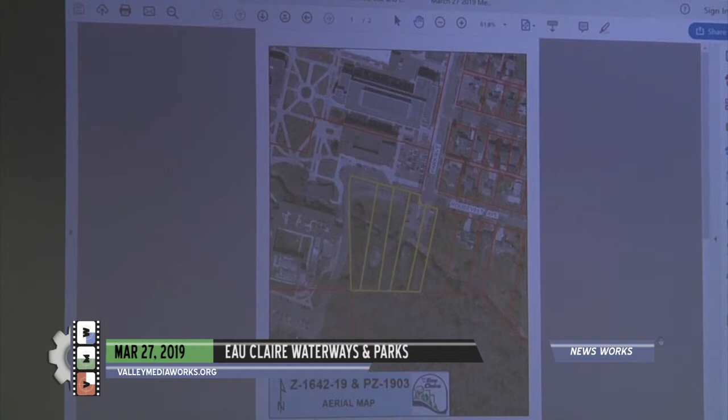University of Wisconsin Eau Claire and Ayres Associates are requesting to rezone property from R1 to public, and then for approval of a site plan to construct a new visitor center at the southwest corner of Roosevelt Avenue and Park Avenue. The property abuts Putnam Park and Little Niagara Creek to the south, thus requiring review by the Waterways and Parks Commission. The west portion of the property is currently zoned R1.

That would be rezoned to public. The east portion is already zoned public. The overall size of the property is about 1.3 acres.

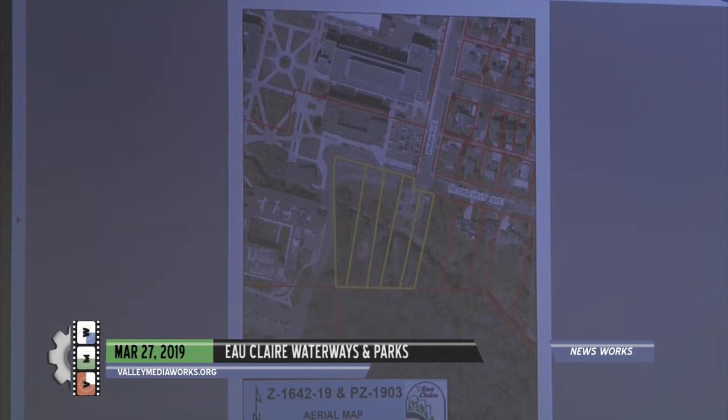So here's Roosevelt and Park Avenue. This is the parcels right here. You can see Little Niagara kind of going through here. Roosevelt Avenue actually was vacated west of Park Avenue last year, so this is all part of the university campus here.

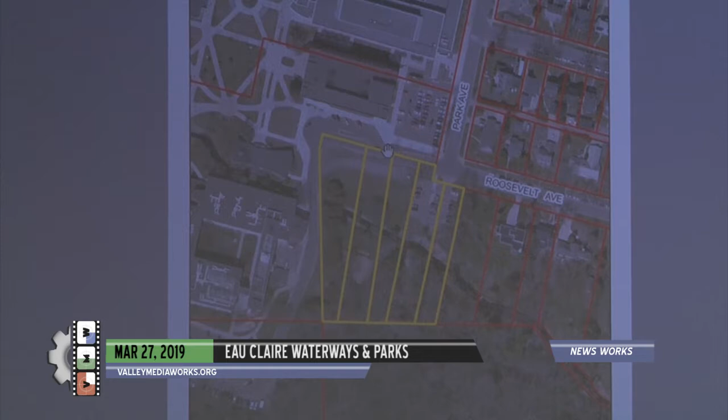This shows the zoning within the area. As I mentioned, the west portion here currently is zoned R1, and that dates back to a few years ago when there actually were some homes on that lot. Those homes have been removed, and currently the property is vacant. The east portion right here is currently zoned public.

So as I mentioned, it's kind of a two-step process. This portion would be rezoned to public, and then we're looking at a site plan for the visitor center. As you'll see with the site plan, the actual portion of the visitor center will be on the north side of Niagara in this area right here. The site plan.

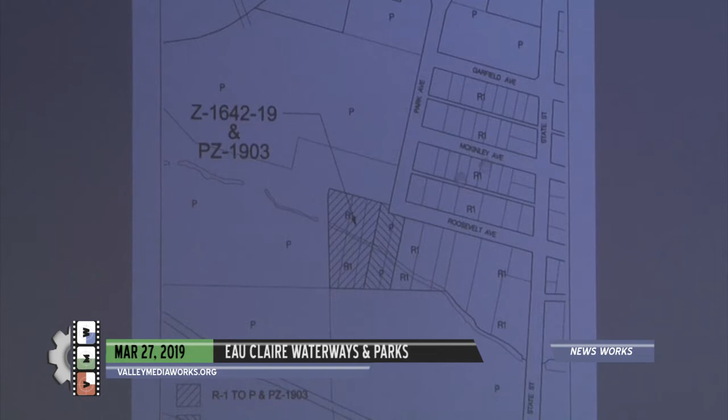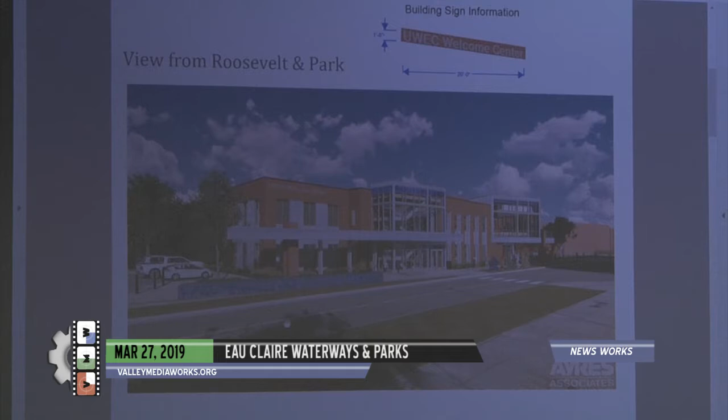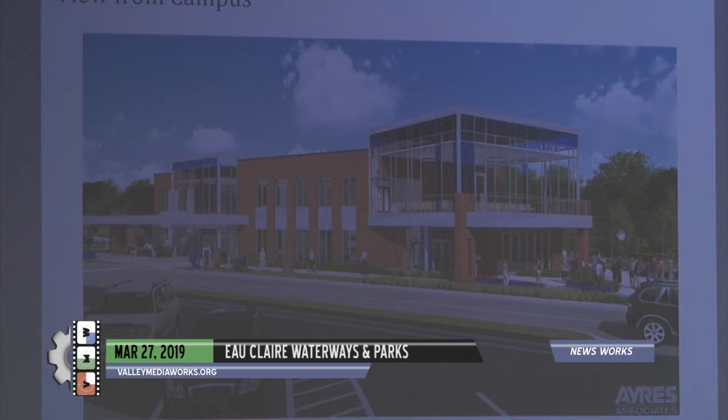These are some artist renderings, conceptual, looking from Roosevelt towards the southwest, and from Roosevelt looking towards the southeast. The back portion back here would be where Putnam Park and Little Niagara is located.

This is looking straight east, so this would be the west side of the building. You can see with the site plan there are some plaza areas back to the southwest portion of the building, back in this area here. The third ward residential area would be back in this area here, to the east of the building.

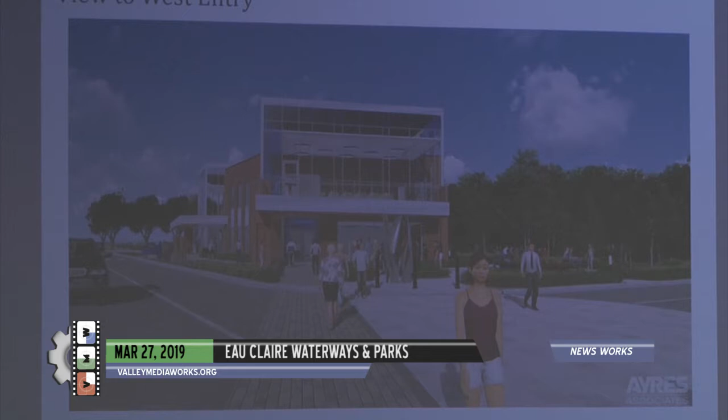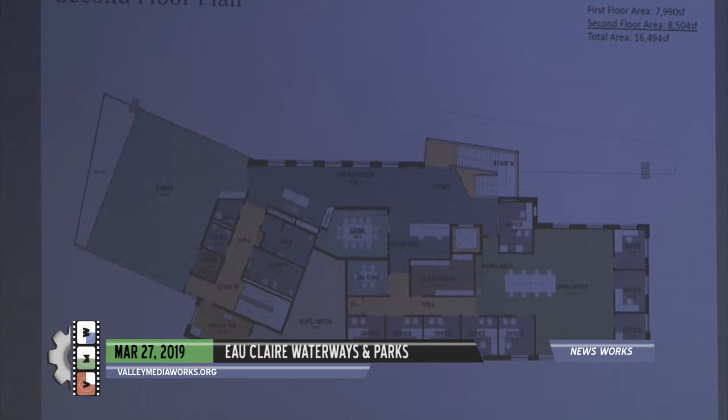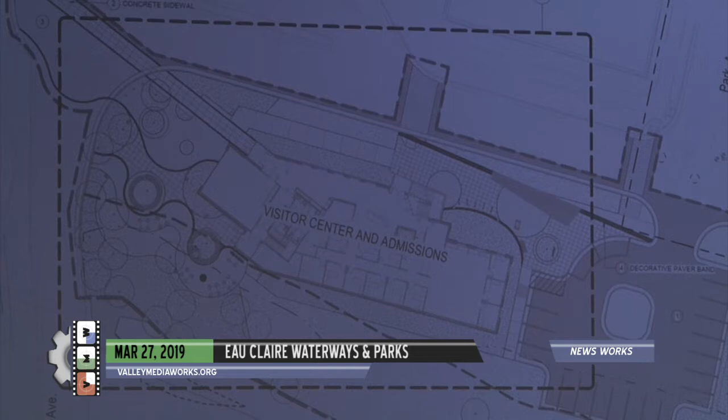This is the plaza area back to the southwest, again using the different kinds of materials. There are some planting beds along the building, and then planting down along this area as you get closer to the creek area.

One thing I did want to note regarding the building and the landscaping is when referring back to the waterway guidelines, the site plan and building does a nice job with following some of the guidelines within the plan, such as for the building features.

Some of the recommendations are that the building have equal facade treatments on all sides, windows facing the waterway, and that it encourage plazas and decks. Materials of the building should be wood, stone, or architectural accent materials, and low reflective glass. So a lot of the things recommended in the waterway guidelines are incorporated into the building itself.

The landscaping itself I mentioned also has provisions in the waterway guidelines. This site plan does a nice job incorporating those types of landscaping along both the front and the back, closer to the waterway itself.

Lighting for the site will include a variety of fixtures, including pole-mounted fixtures for the parking lot area here, and some pedestrian or lower bollard-type lighting in the plaza areas located in this area here. There's also a decorative lighted wall that would be located along the front of the building, lit internally with LED fixtures.

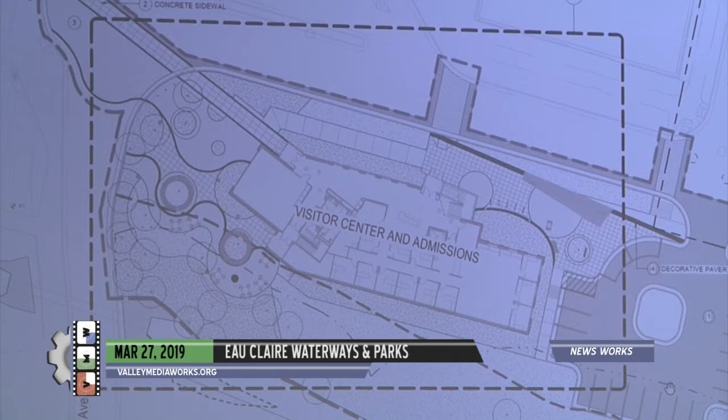As with previous applications with the commission, the focus should be on the comprehensive plan and the waterway guidelines. The comprehensive plan and the third ward neighborhood plan both show this area as part of the campus boundary, so it is consistent with both of those documents.

Staff recommends approval of the rezoning and the site plan as they pertain to the waterway guidelines, with the one condition, subject to DNR approval of that wetland waiver.

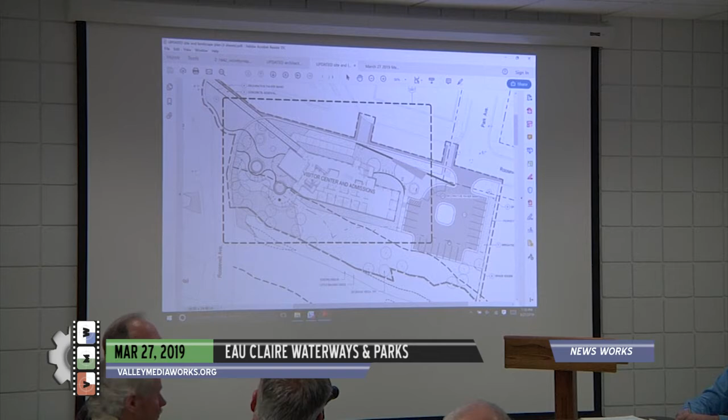This will be reviewed by the Plan Commission next Monday on April 1st and then by the Council on April 8th. So with that, if you have any questions, there are representatives from Ayres and from the university here. Anyone have any questions for Pat at this moment?

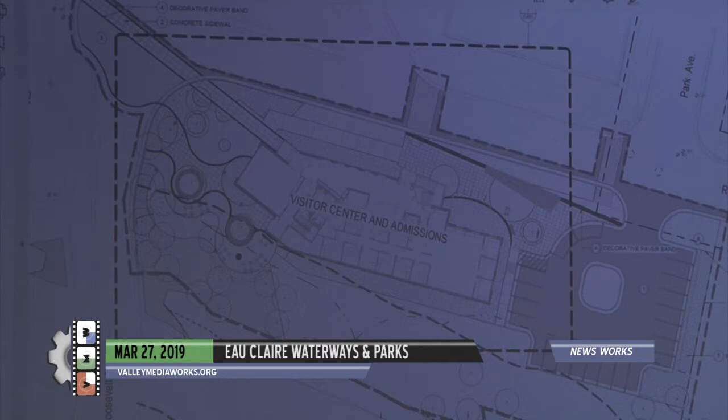There's another dashed line that looks like it lays right on the north border of Little Niagara there. Right here? Not that one, just it's a long, right there. What is that?

We'll have someone from one of the applicants explain that. Okay.

I think they did a nice job. Obviously somebody put a lot of effort into it. The building materials are attractive and fit in with the character of the campus, so I have no problem with that. The reason we're looking at it is that it borders Little Niagara.

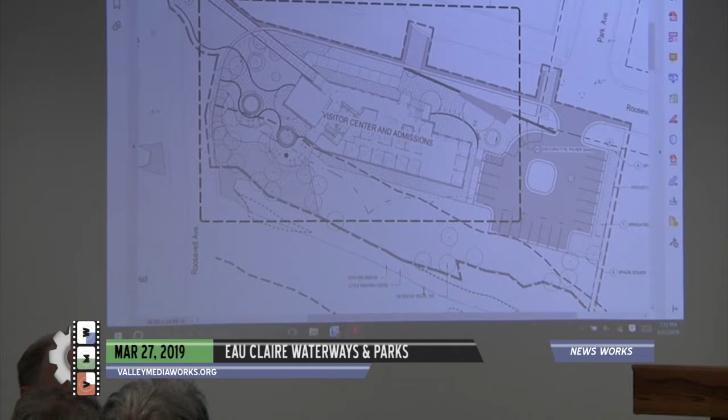I'm surprised we didn't get an artist's concept view, the color view as it would look from Little Niagara. We saw the front side, but not the back side, not the south side. We did have the drawing, the elevation, but I saw the elevation, I didn't see a color artist rendition.

This does show the different types of landscaping, different kinds of building materials and landscaping materials being used back in that area. So this meets our requirements. I'm sure it's just fine, but in my mind, when I looked at that black and white line drawing of the south elevation, it looked kind of plain, and I was hoping to see an artist's rendition of it.

Susan? I had the same reaction. I felt like all the huge windows are on the fronts and the ends, but the part that actually looks at the waterways are private offices. And that facade, the waterways plan is rather specific about the part that's parallel to the waterway not appearing to be just a long blank wall.

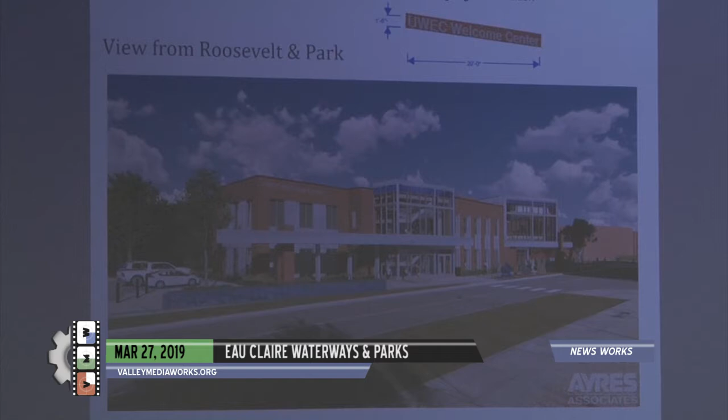Well Pat, did you say they have similar facades on all sides? They do have the brick facade, same as on the front side of the building, on the back side of the building. No, it's a lot different, but based on the standards, there are a number of windows along the back facade.

And you have this area on the west end that's much more glass, which would be this area right here. So if you're looking back along from the waterways, this whole open area basically fronts or is open to that back area. So I guess, as I mentioned, our feeling is it clearly meets the guidelines.

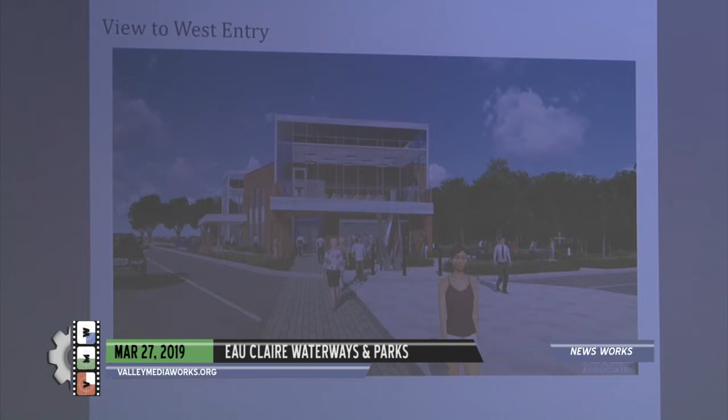Eric? Can you go back to the one that had the drawing, just black and white? I'm sorry, the one we were at with topography. Yeah, that one, this one.

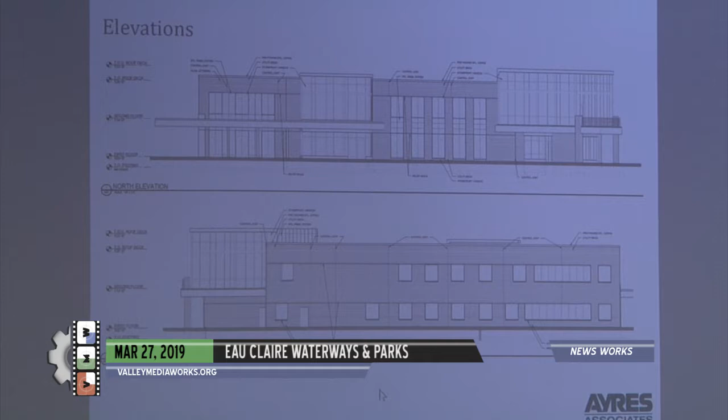I was just wondering about the DNR, if there's a paver over there within 50 feet, because that pavement over here, like that little circle area right here with the black dot and all those, would that need to have some type of waiver? For the city standards, the building should be at least 50 feet from the ordinary high water mark.

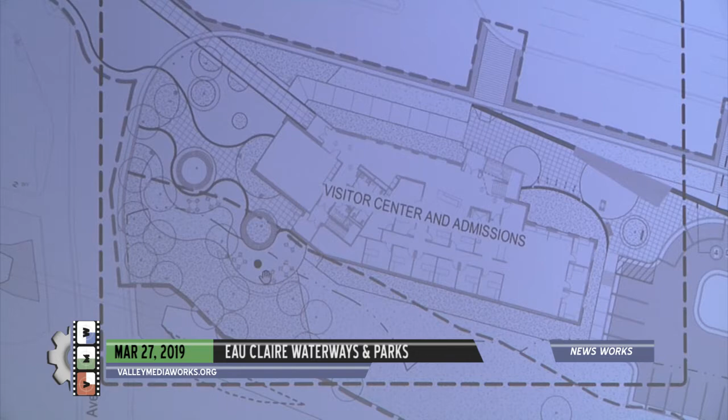It's acceptable to have these plaza areas within that area. Isn't that what they're asking, a variance on that 50-foot setback to put the garden areas there?

It's my understanding it's for the parking lot area back here. That's for the DNR to decide. But for our commission, I think we're deciding on this, on the left side there, the garden areas. There is landscaping and development being done inside the 50-foot setback, and that's acceptable. The 50-foot setback is for the building. You can have the landscaping within that 50-foot setback.

Tom? The one thing I really see as an advantage is that there's access to the creek. There's seating and ability to sit by the creek and do whatever, where now that land isn't accessible or people don't use it in that form. So by building that plaza to the west and to the south, I think that'll really be a nice area and a nice enhancement to the creek.

For people to enjoy the creek. One of the things I've always felt is that UW never really used and realized the value they had in terms of that creek running through. They're doing a much better job now in the latest buildings and renovations that have occurred at the university.

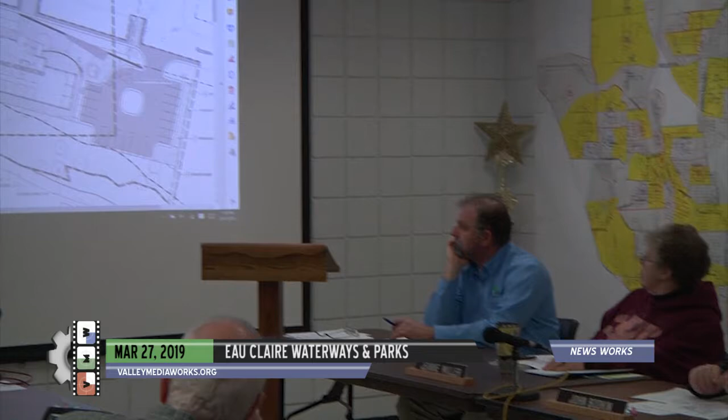Ron? What does that dotted line to the south represent on the creek? Right there, what is that? That white dash line, which specific line are you talking about? Where the hand is located right now. Is that a wetland boundary? That's just a contour line, but it's where the creek is flowing. It's the creek edge.

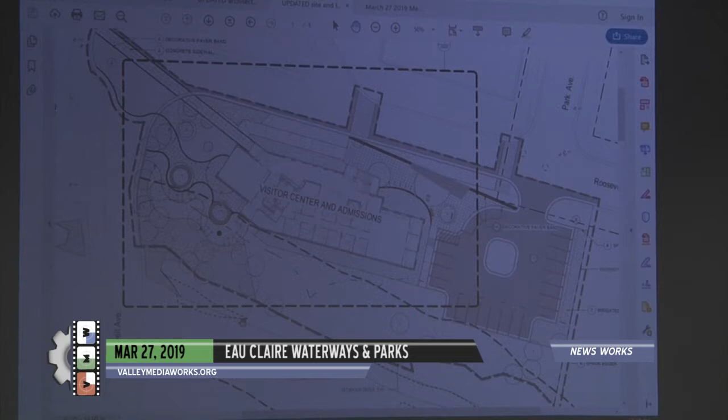Well, I think the north side is flush with the heavy dotted line, but then you have that smaller dotted line perhaps representing the south. Well, is that the case?

The creek is right here. So the creek would have a dotted line farther to the right of where the hand is, but then it gets hidden by the dark dotted line. So up on the left side, that's the south boundary of the creek, I think.

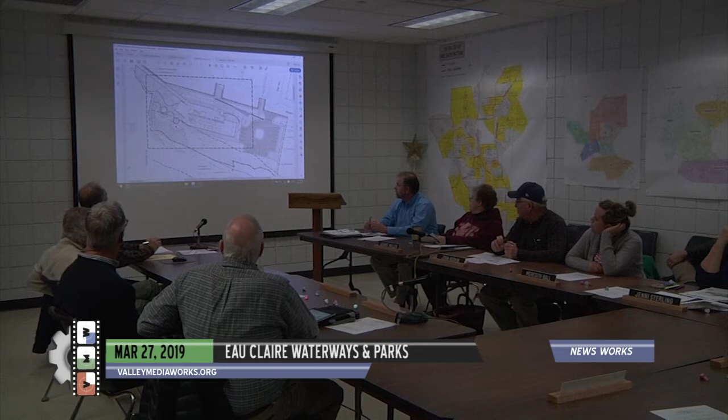I think it's a contour line, the edge of the creek. The straight line here indicates the wetland boundary.

For the short dashed line, so this one right here, yeah. So from the wetland boundary, this is the 50-foot distance right here.

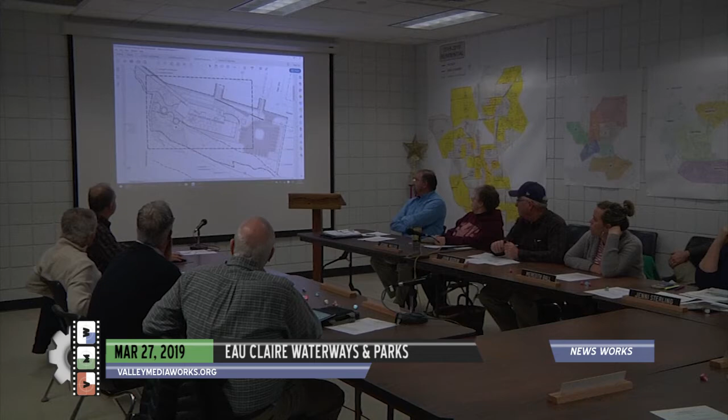Are there more questions for Pat? If not, I was going to invite, okay.

I think what a lot of people are mentioning here is what I'm noticing. When I first looked at this, I see that the building is completely parallel to the street above it, but askew to the creek below it. Therefore, in the planning of this building, not much attention was paid to the creek, or not as much as the road, even though the creek was there before the road and will be there long after the road.

I really don't know why they feel the need to have a front yard for the building. It could be beautiful, I don't know, but you could just as easily have moved the building closer to the road and given more space to the creek.

And for all that is going on here, and for our guidelines, I don't see any of our best management practices slowing down the runoff from either the parking lot, the plaza, or the building. Pretty much everything's going right into the creek. Across the road there are two academic buildings which have a rain garden between them, but I don't see any rain garden in front of the creek here.

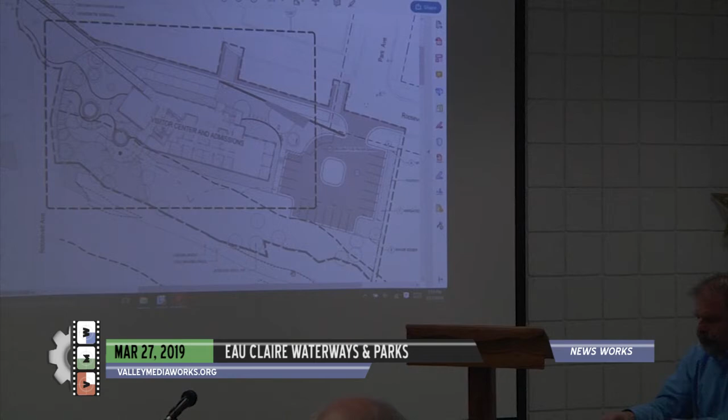The existing parking lot has a storm drain at the south edge that I'm sure flows straight into the creek. I don't know if that storm drain is going to remain or be replaced, but there should be something that slows down the runoff from the construction area into the creek.

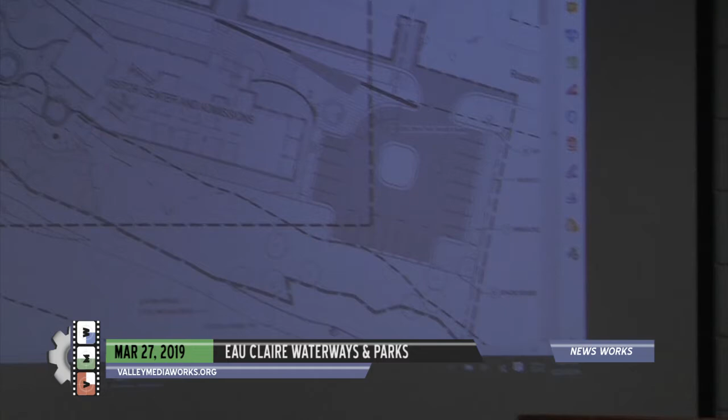That piece of property, even though the paper described it as a lawn area, has been a wasteland for a couple of years now. First the houses were torn down, then the street was torn up, and all the asphalt was piled up on that property. There's asphalt debris right now and no sediment control into the creek. I really don't think any attention has been paid by the architect to the creek.

I would like to see some kind of rain garden or berm to slow down the runoff, and perhaps some erosion control during the construction project at least.

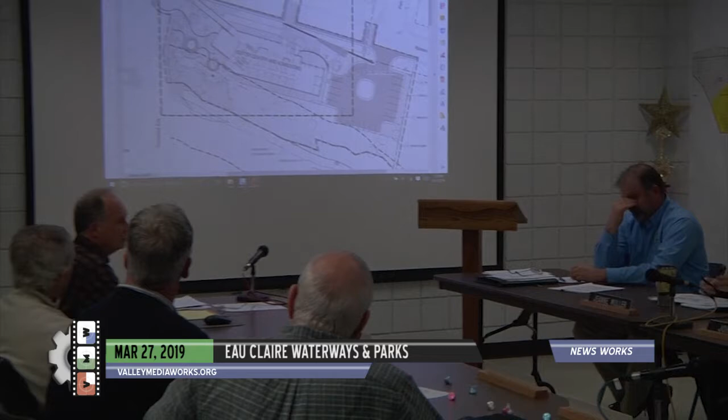The city engineering will be reviewing the drainage calculations for the project, and they'll be reviewing those kinds of things. During construction, erosion control is a requirement of the city and the state, and that'll be followed.

I hear your comments, and I saw that in the proposal here, but I don't have a lot of confidence in it. I think there should be something drawn on the paper and presented showing where the runoff from that parking lot is going, and the drainage from the rooftop of the building.

Kirk? Is there any pedestrian connection between the parking lot and the little patio plaza area on the creek side of the building?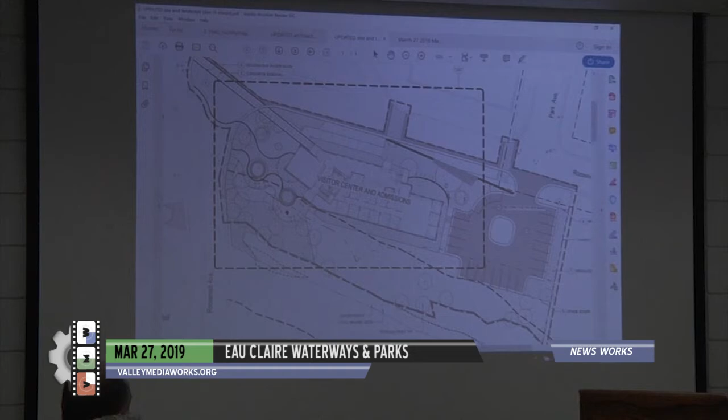It's my understanding that there would be, along the front and then over the side here. Just along the front, but not on the creek side? Not along this area here, no, that's my understanding.

How are they to access the other circled areas that would maybe be more? I think you can ask the applicant.

Actually, if there are no more questions for Pat, perhaps the applicant could address this. Is there anyone from Ayres or the university that wants to give us some information on the technical questions?

If you like, come up to the podium and introduce yourself, please. Lisa Fleming, I'm with Ayres Associates. I'm standing in for Angie Goodwin tonight.

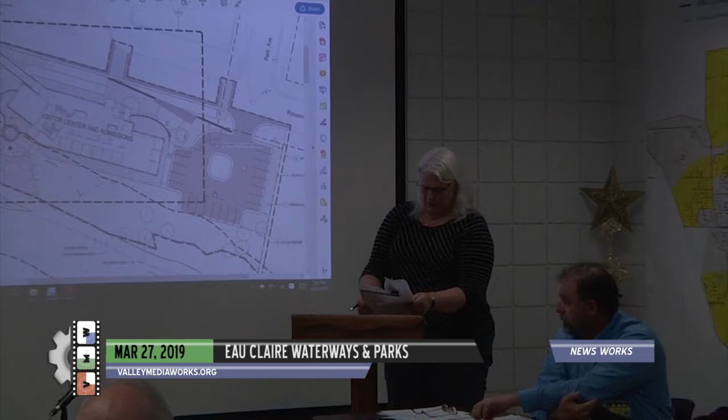There have been a few questions, so if you have any answers, you want me to just answer them then? Sure, go ahead. Okay, well, the stormwater is being managed per the DNR and the city regulations, and it will be slowed down and filtered before it reaches Niagara Creek.

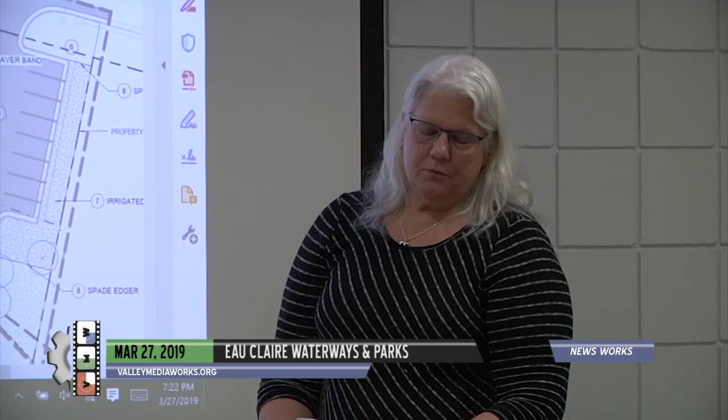We also have a biofiltration sediment area that's going to be incorporated, so it'll meet the city's requirements of 40% TSS, which is total suspended solids runoff. Roof water is considered clean water if it doesn't pass over a paved surface, by both the city and the DNR.

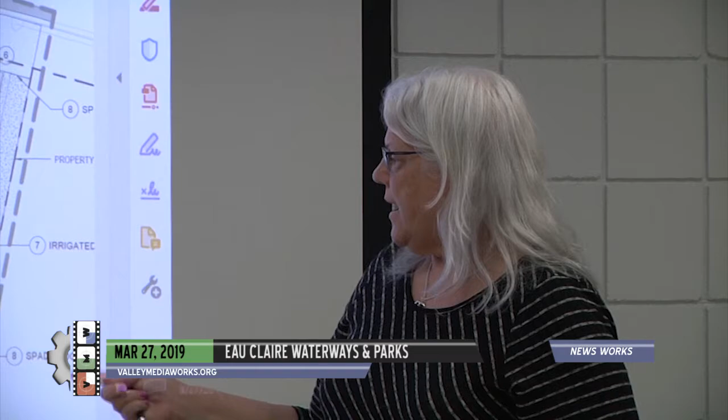The access to those little areas that you talked about will be from the parking lot, through and around here. There won't be a path along here.

Thank you. Were there other questions for Lisa?

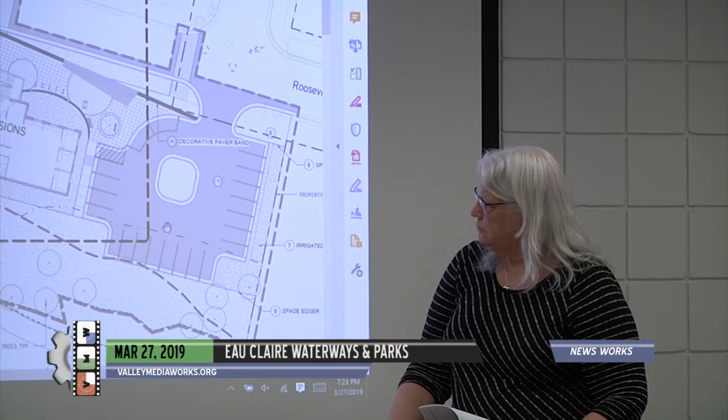Is the topography right there on the edge of the building? Do you know if it's slanted or flat? I would assume, but I don't have a definite answer on what that is.

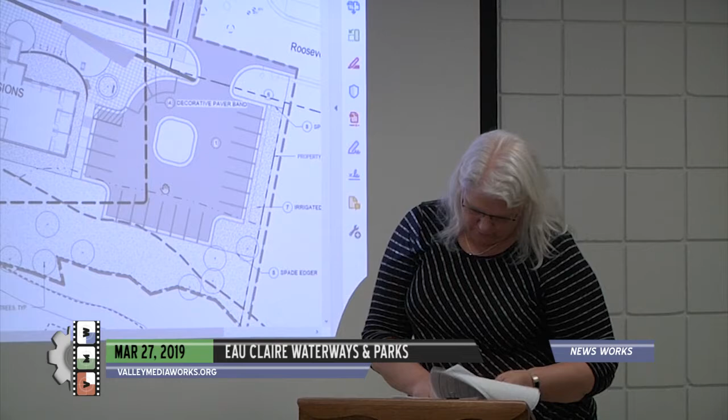Travis, do you know what that material is? I know it remains relatively flat as it separates away from the building for the first 5-6 feet, then it grades down more aggressively as it gets towards the creek.

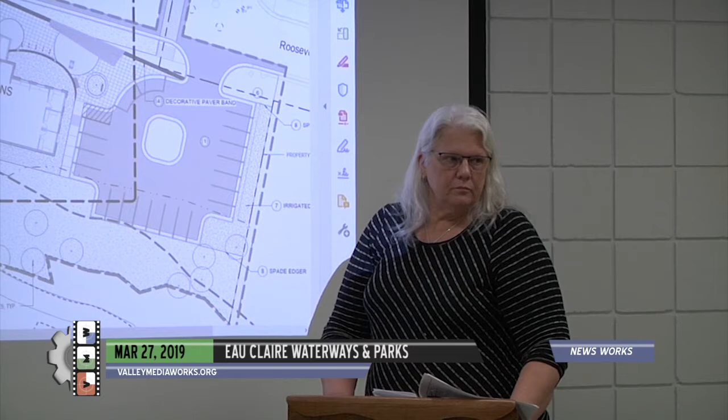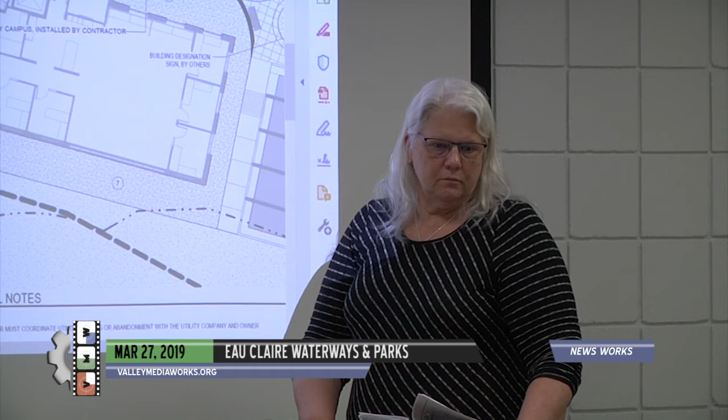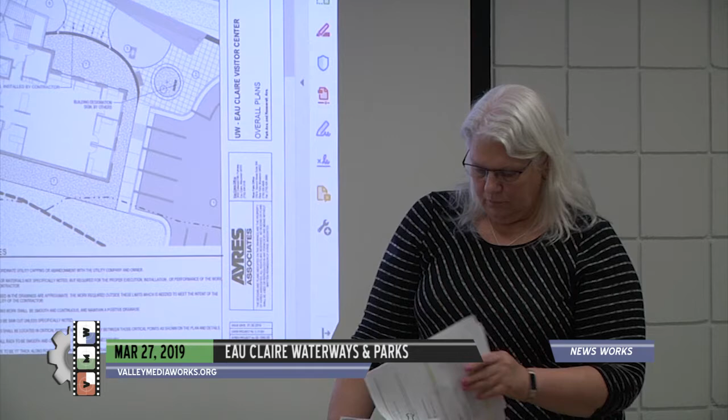Susan asked: I was wondering if you could comment, it does seem that the design places the individual offices on the interior, right next to where there could be windows or public access. I think of your other university designs as more sensitive to the environment, so maybe you can talk about that. To me there's a distinct difference between the south facade and all the other facades, and yet the south side is where the waterway is. Architect, could you bring up the image from the two?

Yeah, could you answer that, Travis? I'm not the architect, I did the site work. Obviously the project from the start posed an interesting question. In fact, this building has no backside - we face Roosevelt, we face the park, we have the parking lot off the east side, and we do face Niagara.

Obviously the programming, because we're parking off the side and pedestrian access is off Roosevelt, gives us a natural meeting point for people entering the building. So putting the offices on the roadside was an early decision - it probably wouldn't work best for what the university's trying to achieve, which is to provide a welcoming spot as you enter versus going further back into the building. We did consider quite a few options, trying to figure out how to work Niagara into this.

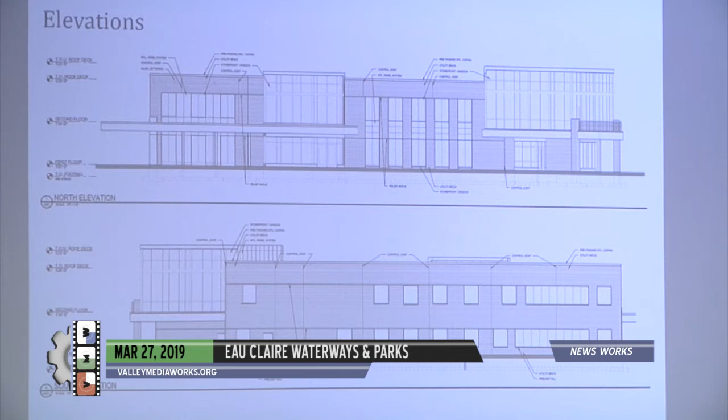Obviously it looks like the back of the building - we don't have all the aluminum panels we're using on the other sides, so maybe that's jazzing up the other sides more than this side. However, the presentation room, the lower sketch on your left, does look out to Niagara as well with that plaza. There was also some discussion that the workers in this space get to enjoy the view. Granted, the public doesn't see Niagara until they get to this presentation space on the second floor, but they are encouraged to go out and walk around, hence the plaza, to experience that environment.

Is the presentation space generally open, or is it like an auditorium? Generally open. The biggest thing is the presentation space serves both alumni and admissions in this building. It'll serve larger groups - admissions is on the first floor, so they take larger tour groups up to that larger presentation space. That space is also planned to be used for alumni events and a few other after-hours events.

So as far as remaining open, I guess that'd be more of a university question - if somebody from the public wants to come up and walk into that space to see the view, if it's not being used, perhaps Mike can answer that. I'm Mike Rindo, Assistant Chancellor for Facilities and University Relations at UW Eau Claire. I think they've done a nice job outlining it.

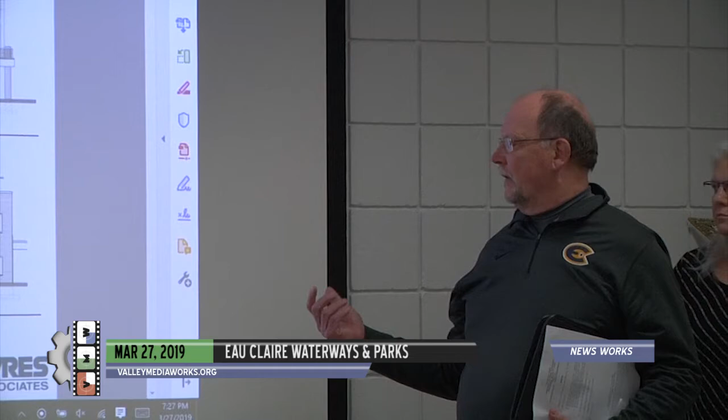We are trying to maximize Little Niagara, even though a lot of the views are from private offices in the building. The plaza is meant to create porosity from Roosevelt down to Little Niagara, and when people gather prior to and after tours, they'll be able to have overlooks of Little Niagara, with areas to come down and actually access the creek. I think the presentation room is going to have a million dollar view - one of the best views on campus, both into the campus and down to Little Niagara. I appreciate the comments about what the university's been doing to try and really maximize Little Niagara through the campus.

In the past, the old Davies Center abutted right up to it, and it really became more of an overgrown ditch than a beautiful asset, which we believe it is now. When we did the new Davies Center, we had one of the top DNR stream reclamation specialists come in and do a real reclamation of Little Niagara all the way through campus, putting in plunging pools, opening it up, making sure it's not overgrown anymore.

That would be the intent here as well, so it would be much more accessible to the public, much more viewed by the public, and the folks in these offices will really enjoy the view. In terms of the front of the building, I think they hit it right on the head. When visitors come in, they'll traverse the building down Roosevelt to access the admissions presentation rooms, and that's why we have the main corridor on the front and not the back of the building.

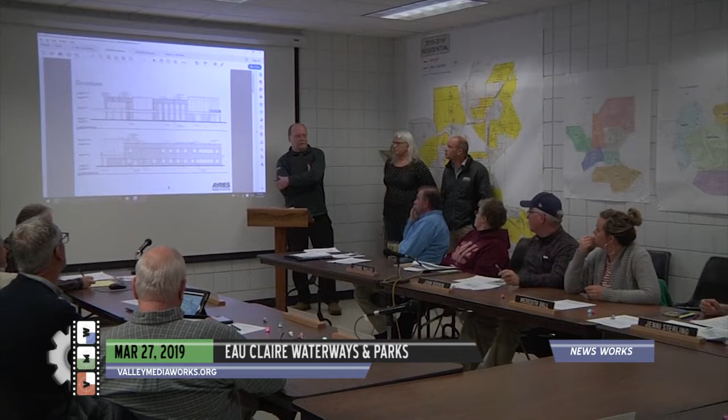Any other questions for Mike or Lisa or Travis? Susan: I would suggest maybe for the other presentations, the plan commission and the city, it would be good to have an elevation like you had for the other three. The fact that it's not there makes it seem as though it's being underplayed. We can look into that. There's a cost associated with full renderings, but we can look at whether Ayres would be able to provide us that rendering from that view as well.

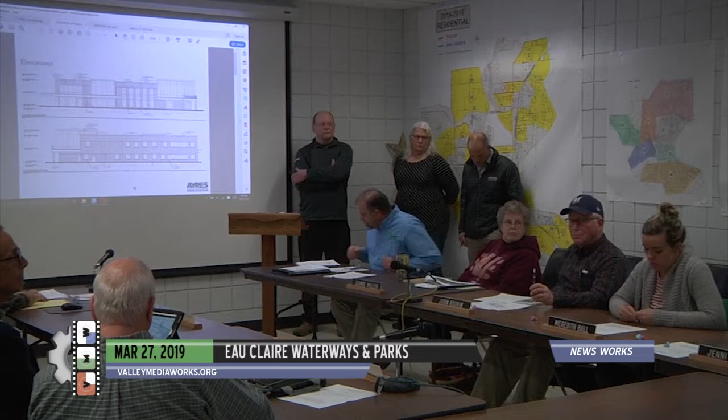Any other questions for the applicants? Jenny: Just a couple of questions about during construction - what are your thoughts about State Street being under construction, Roosevelt now being utilized with construction trucks and so forth, construction workers coming back and forth, and then access to the Phillips and nursing parking lots?

The Garfield Avenue redevelopment project, which we've had under construction over the past 2 years on campus, is substantially finished. That's why those houses came down and why there was a temporary roadway put in as we were doing improvements underneath Roosevelt Avenue, including utility replacement, just as on Garfield Avenue. That's substantially complete, so we don't anticipate a lot of truck traffic on Roosevelt going back into the Phillips and Davies lot. Same along Garfield Avenue, although there will be some equipment this summer to repair concrete that was cracked during installation or from heavy equipment.

But Roosevelt will be dug up to connect steam and condensate from the Phillips Science Hall. We'll have to take a segment of that road out as we're constructing this, but then it will be patched over during this process.

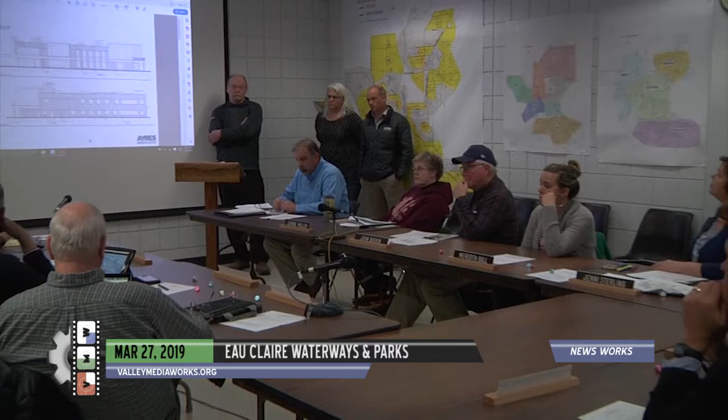Kirk: Mike, at the start of the presentation, you showed us the yellow line drawing of the rezoning, which shows land on both sides of the creek. Is anything planned for the south side of the creek? No. Those were deep lots when they were houses, so they had lawn back in there. We intend to maintain that, but we're not talking about any structures down there at all.

This doesn't have to do with the creek, but looking at the floor plan, we've got 22 office spaces, 2 reception areas, and a meeting space that looks like it could hold about 50 people. And we have 22 parking spaces. So I don't know where all these people are gonna park, but I imagine it's gonna be in front of my house, since I live on Roosevelt too. I understand the office spaces are not new hires, they're coming over from Schofield, but I just don't know where all these people are gonna park. The university's pretty limited with parking anyway.

Well, I think you answered your own question, which is that these are not new staff. Those staff typically are parking now in Phillips, Davies, Hibbard, HSS, Water Street, and they're coming to Schofield from that area. They do not park in the current visitors lot.

But you're gonna be welcoming visitors, which could be 50 at a time at least. Well, not at least 50 at a time - typically we have much smaller groups, but we can't accommodate that many. We do that currently on campus in the admissions office. Often, if we have larger groups, they receive parking permits to park in the HSS lot and come across the river. We have reserved spots in front of Davies right now for future Blugolds, and we're also looking at using the Schneider lot, directly across from this and adjacent to Schneider Hall, for some of that parking. Okay, thank you. Welcome.

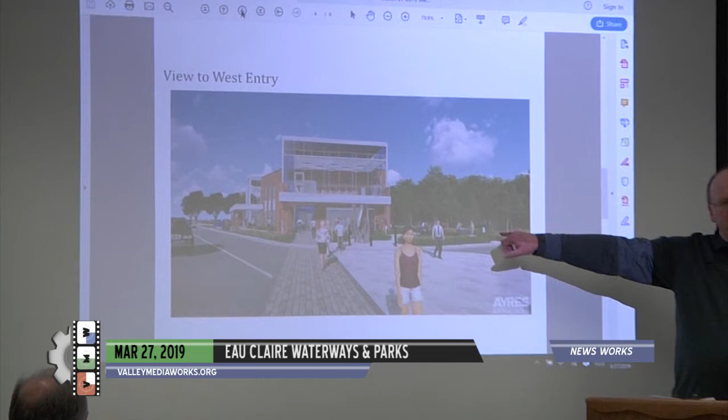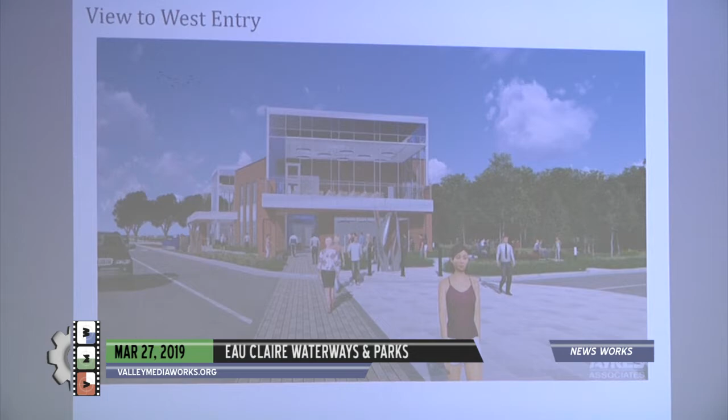I think you can see that somewhat in here. That is the intent, is to create areas for people to sit, to gather, to be able to overlook the creek, which is taking advantage of the creek. Once you start getting into the elevation changes, it gets steep there, and so we probably don't want a lot of people accessing down behind there, right behind the building, because of the grade change. Meredith? I guess, just a wonder would be, is the reason you don't have a sidewalk on the back side of the building because of the offices and you don't want to encroach on people's privacy, or?

It's the elevation change. So you either have to put a sidewalk in the front or you have to put a sidewalk in the back. But there's really not sufficient space to be able to do both. We have to have sidewalks of sufficient width so we can get our snow removal equipment up and down it easily. We want to have some separation from Roosevelt Avenue so that we don't have conflicts between pedestrians and motorists coming in and out of there. That's why you can see we've got a wider crosswalk here, although it probably won't look like this in the end—it's going to be a wide striped sidewalk. But we'll either use bollards or large planters here to ensure that we don't have pedestrian and vehicular conflicts. That's one of the reasons why we're doing it along the front of the building—we just don't have sufficient space to go all the way around the perimeter.

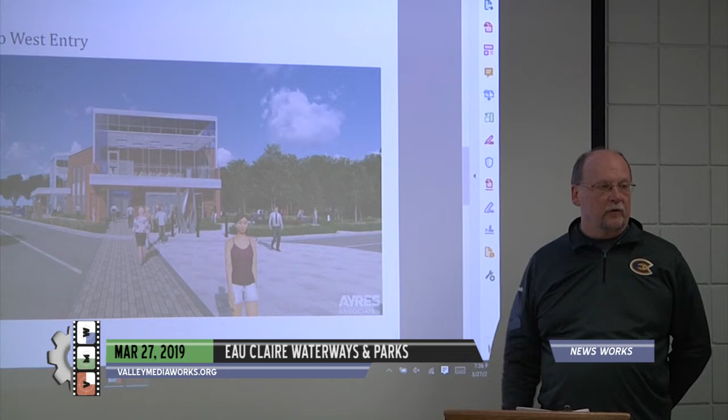Are there any further questions? Susan? What was your interaction with the residents of the neighborhood that's just beyond? How were they informed about the project and what were their reactions?

Our planning team met with members of the Third Ward Neighborhood Association to review the plans, and they were pleased with the plans. You may recall that our master plan intent originally showed that we would have a small residence hall there. There were some objections from the neighborhood to that. We revisited the master plan after Chancellor Schmidt came to campus, and we came up with this as the next highest use of that land. It's a very small parcel, so it doesn't have a lot of carrying capacity.

This fits on there. It's only about a 16,000 square foot building, a little north of that. And the way that it's angled, we think really takes advantage, especially from the presentation or the views to Little Niagara. This comes right down the middle of the campus mall when you're looking out at it, and also incorporates the views of the creek and the campus central mall.

As part of the process, we are sending out notices to the property owners within the vicinity of the plan commission hearing and the council hearing, so the immediate neighborhood is aware of it also.

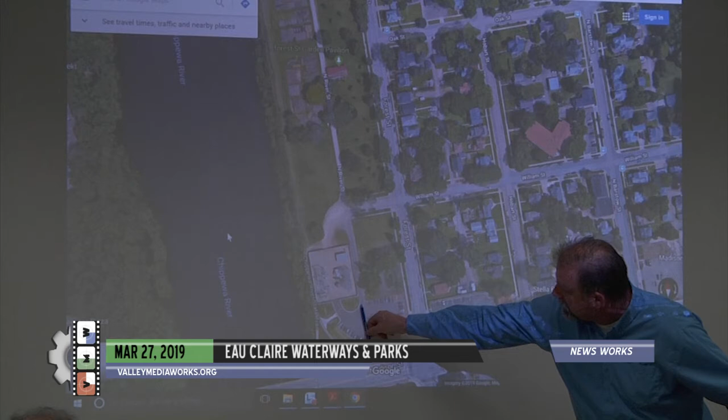This roadway into the parking lot, Susan, is Xcel Energy's property. We had to get an agreement with them to allow that. This half of the parking lot is Xcel's, and this part is already city property, but because we approached into that lot, there was an agreement made some years ago before we built the parking lot.

So the Veterans Tribute people know about this planned expansion? Oh yeah, they actually wanted to meet with Xcel to vet that as well, because they ought to know that's coming in case it would change their design perspective.

It's still Xcel property anyway, and I doubt they'll ever put anything there since it's Xcel's. Right, but you might not want your tribute backing right into that zone. Sure. The way the tribute was drawn in by the architects used by the Veterans Association, they knew where the boundaries were and kept their design within the city property boundaries. It was just a matter of, since the trail was coming close to their property, wanting to have Xcel Energy's blessing on their proposal. That meeting went very well.

Thanks, Pat, for the map. Thank you, Pat. That helps a lot. Any other comments on the proposal?

Seeing none, just to recap, if it's approved here, there's a 60-day public comment period, and then it comes back to us before going to city council. The public comments will be gathered for your review, and then ultimately that's when you will make a recommendation to move the name change onto city council.

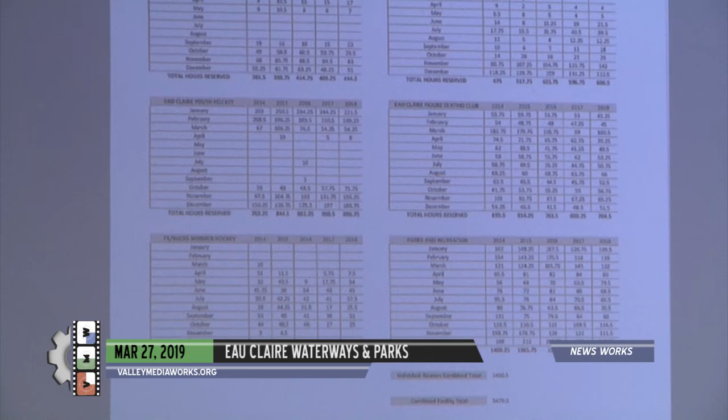The Easter egg hunt last year, Easter is later this year, but last year, if you recall, it was on the 12th of April and it snowed out, we had a foot of snow. They got bummed out about that, but they still held their event.

Run from the cops coming up.

The puddle jump is a very popular event. It's been around for a good number of years for us, and there's a lot of people who participate in that.

Okay, if there's nothing else with the special events list, we can move to the director's report, which is attached.